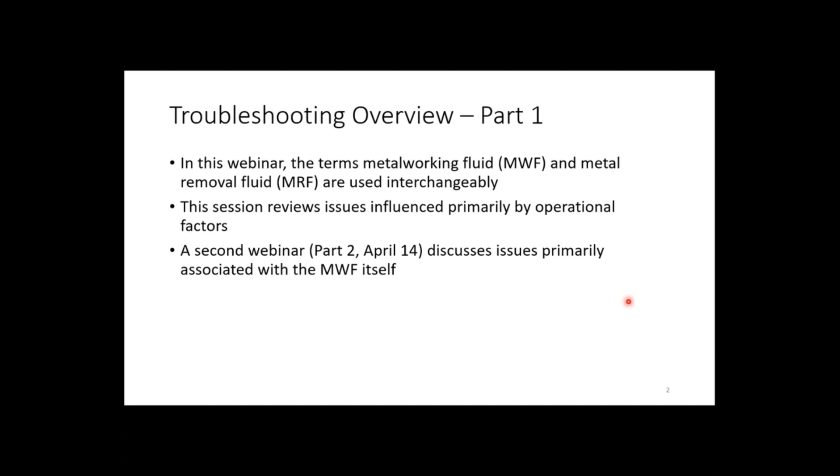principles can't be applied. Looking at, I got to dump the system, or I got to add a tank-side biocide, or I've got to do 100 other things to try and get this thing under control. Monitor. There's dip slides that are very easy to use. They give you basic information, but it's still much better than not doing anything. At least you have an idea.

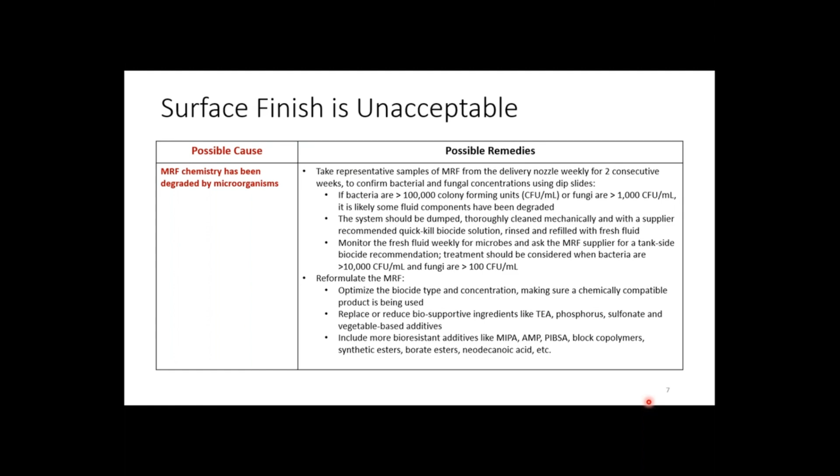You can monitor trends. And you should always consult with the fluid manufacturer, obviously, to make sure that if you're going to add a tank-side biocide, that they're recommending it, that it's compatible, that you know what dosage needs to be used. The tool insert, Sandvik Coromant, again, this is from that training handbook.

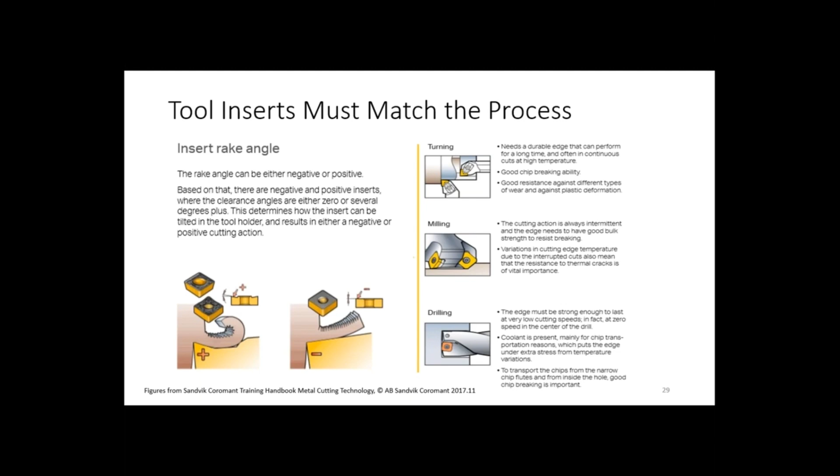The inserts need to match the process. Turning, milling, drilling will require generally different types of inserts. The rake angle on the tool, positive and negative, gives you an example of what those look like. That could be another factor depending on the process, and the tool manufacturer is going to be able to advise on that. So these are, again, things for your awareness. We look at surface finish and we talk about, okay, tool choice.

So this is something, if you're a metalworking fluid manufacturer, maybe you're thinking, I'm not saying you are, but maybe you're thinking, well, the tool is somebody else's problem. I'm not worrying about what kind of insert they're using. I'm just concerned about my fluid and making sure it's working properly. But you need to understand this, because the tool type and the geometry that's being used needs to be

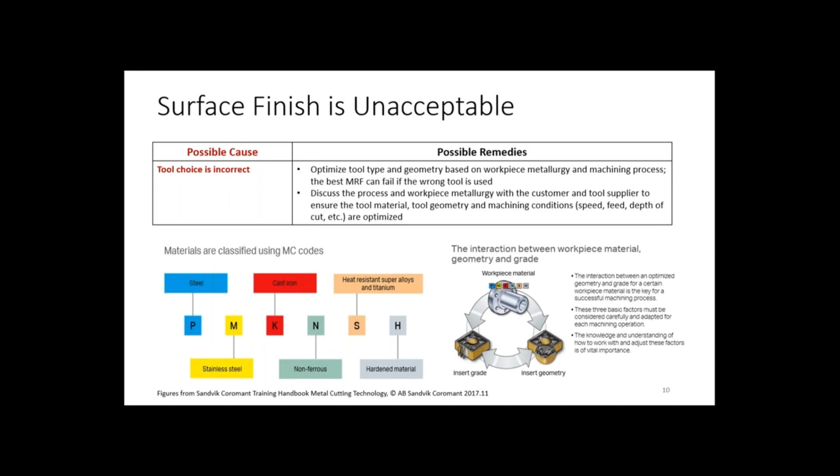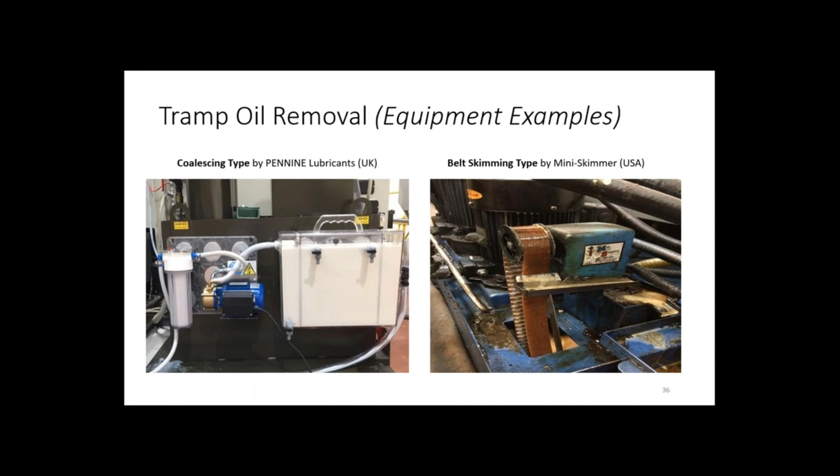The emulsion is losing stability. So it might not be so much you're getting a lot of tramp oil. It could be that the fluid is just starting to separate. It's an emulsifiable oil, or even a semi-synthetic. Maybe the dilution concentration is changing and indicates that you're losing some of the active ingredients into the oil that's breaking out on the surface.

This certainly can be a problem with emulsifiable oils as they start getting used up and you start getting microbial growth. You start eating up those emulsifiers, and now you start getting that oil splitting out. The water hardness, said before, the initial water quality might not be bad, but boy, over time, those salts are building up as you get evaporation of the water. That can start to cause that emulsion to start to come apart.

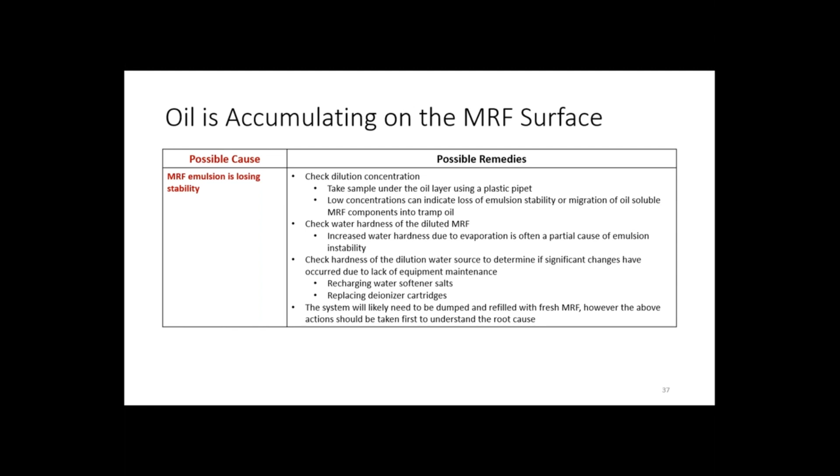So, understanding the hard water tolerance of your metalworking fluid is critical. It might perform great at 125 ppm, but when you get to 500, not so good, so that is something you have to understand. What else here? So check hardness of the dilution water, determine if there may be some changes. Maybe there is a pre-treatment system, but the water softener salts are out and need to be replaced. Maybe the deionizer cartridges are used up, and maybe even accumulating microbes. Those things can grow.

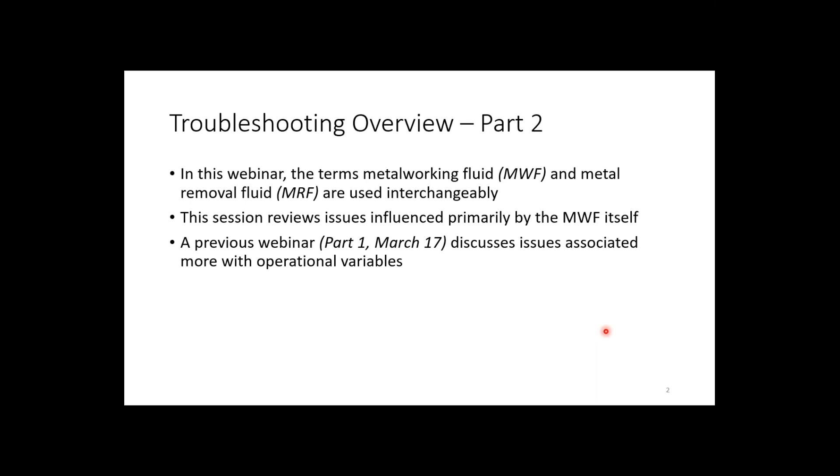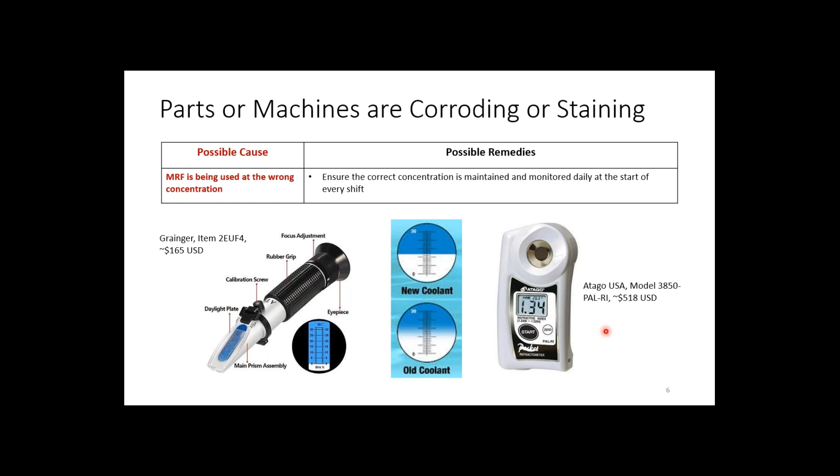Just as an overview, a couple of terminology things. So metalworking fluid, or MWF, and metal removal fluid, MRF, are going to be used interchangeably. So let's first look at corrosion. And the format of these slides is there's going to be a possible cause, and then there's going to be possible remedies. And, like anything, I'm not saying that these are all inclusive. These are certainly some things you ought to be thinking about. And there may be others as well, but these give you a guideline of some things you might want to look at.